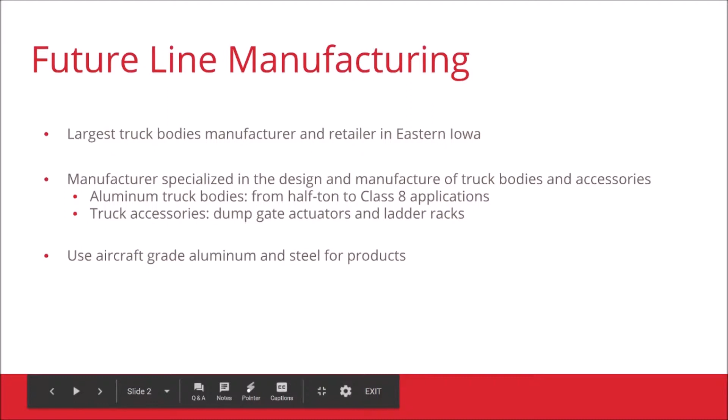The project we are working with is in spring 2019 with Future Line Manufacturing, which is a truck body manufacturer located in Cedar Rapids, Iowa. They produce American-made customizable aluminum and steel truck equipment, bodies, and accessories.

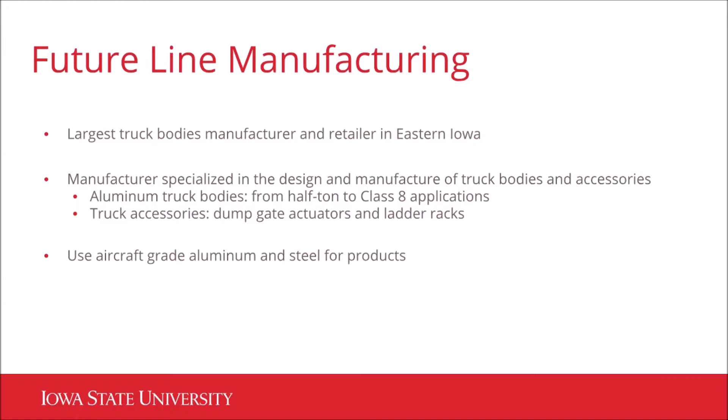The project is focused on the Class 8 dump body, which was recently overhauled, and some formal processes need to be documented. Therefore, our target is to make Future Line Manufacturing have a better grasp on overall production costs and the time it takes to build their Class 8 dump body.

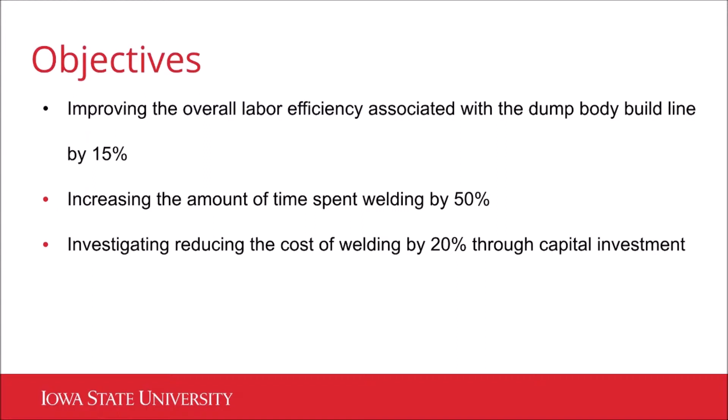The objectives for the group were: 1. Improving the overall labor efficiency associated with the dump body build line by 15%, 2. Increasing the amount of time spent welding by 50%, and 3. Investigating reducing the cost of welding by 20% through a capital investment.

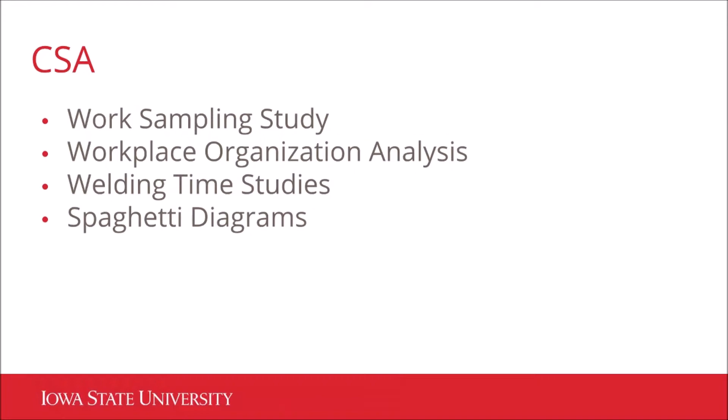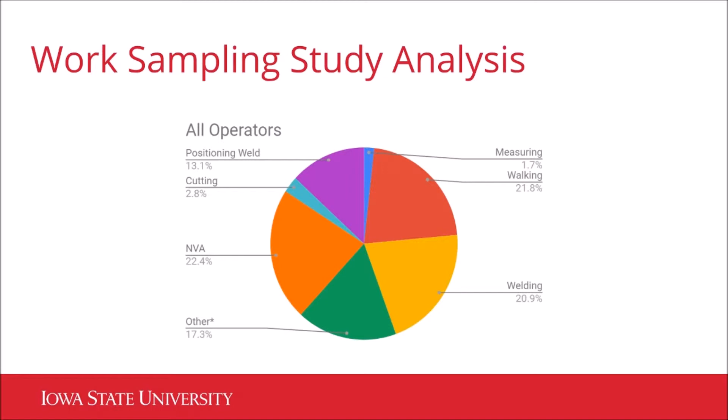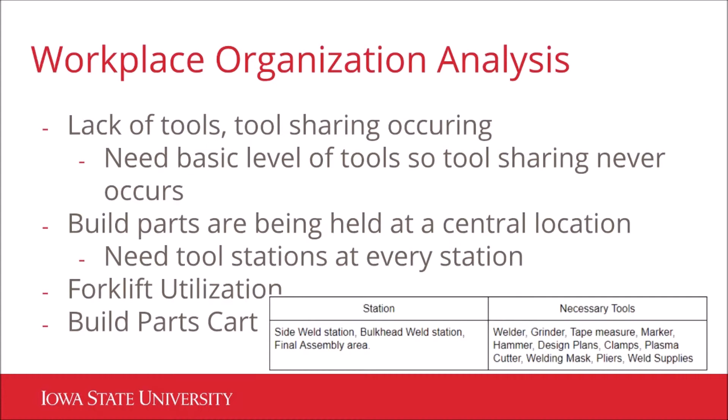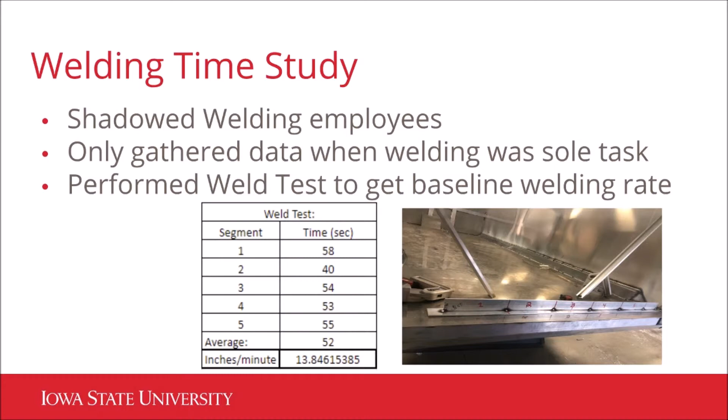For the welding time studies, we all shadowed welding employees when welding was the sole task being performed, and we performed a weld test to get the baseline welding rate, which comes to 13.84 inches per minute. For the results of the welding time study, the value added time was 73.1 minutes, and the non-value added time was 81.9 minutes. As a percent, they are basically 50-50, with the non-value added time being a little bit more.

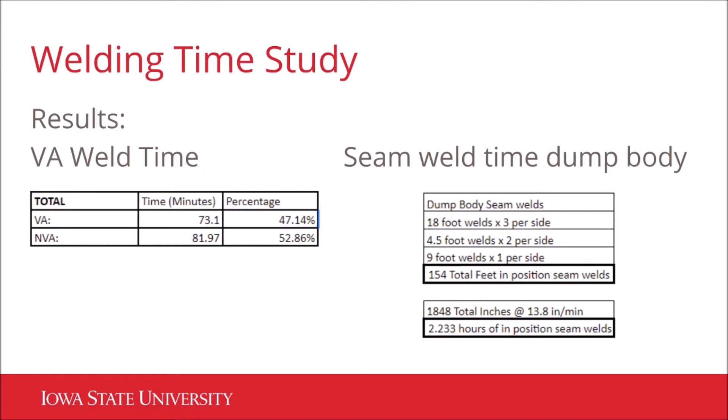There was a welding study performed on a seam weld dump body where there were 154 total feet of in-position seam welds, and the total time for the in-position seam welds was 2.233 hours.

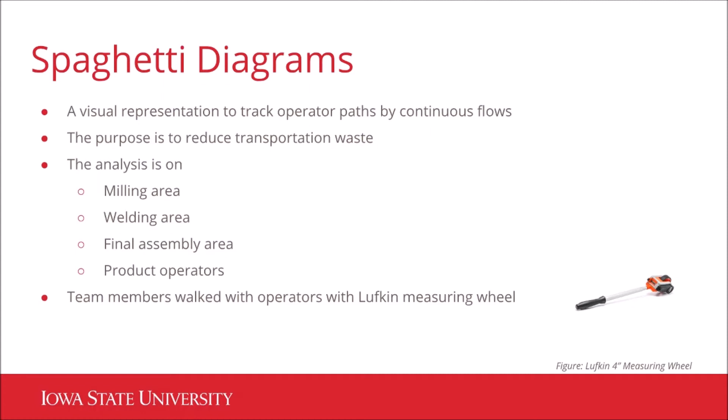For the spaghetti diagrams, the purpose was to reduce the transportation waste occurring in the plant. The analysis was on the milling area, the welding area, the final assembly area, and the product operators. The team members walked with operators with the measuring wheel pictured in this slide. And here's a sample spaghetti diagram that was performed on an assembly operation.

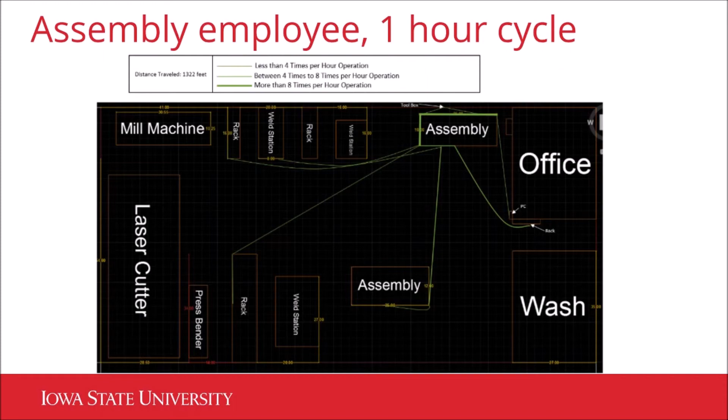Our solution for Future Line Manufacturing was to create a standard operating procedure for the Class 8 dump body line. A standard operating procedure would create a standard work process, increase ergonomics of workers, reduce movement within the build process, reduce variation and errors within the build process, reduce the number of steps for assembly, reduce assembly time, as well as provide a training tool and introduce 5S and workplace organization.

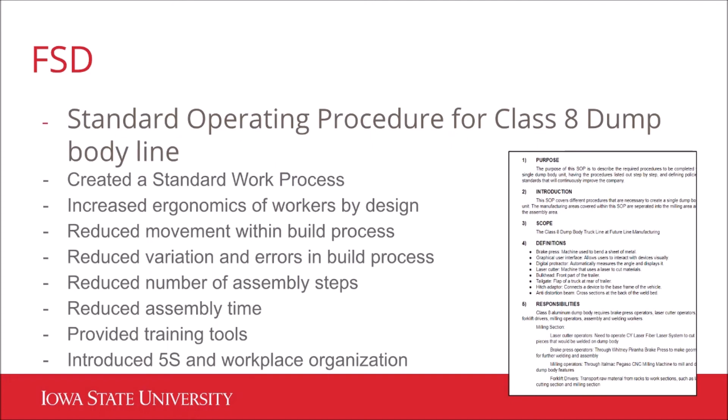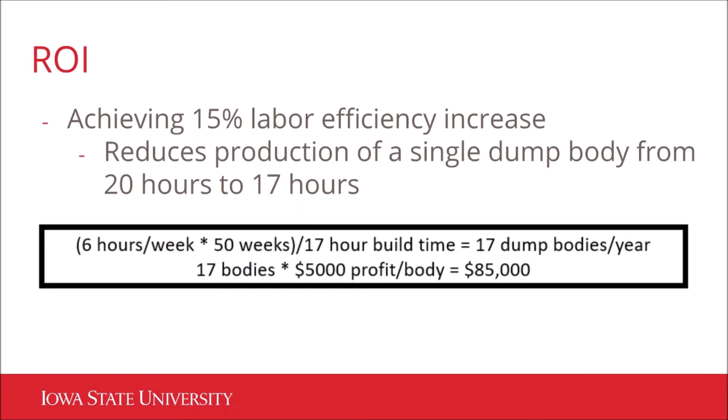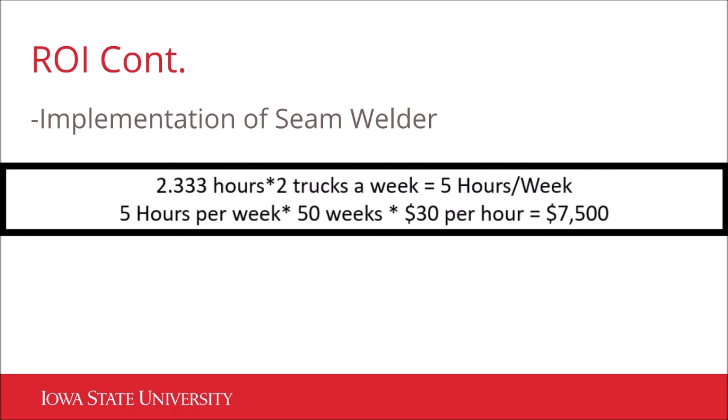As for ROI, if all our objectives are met, including achieving a 15% labor increase, we would see an $85,000 ROI. Achieving an increase in employee time spent welding by 50% would result in $31,000 of ROI. And implementing a seam welder would be $7,500 of ROI, for a total of $125,000 if all objectives are met and implementations are in place.